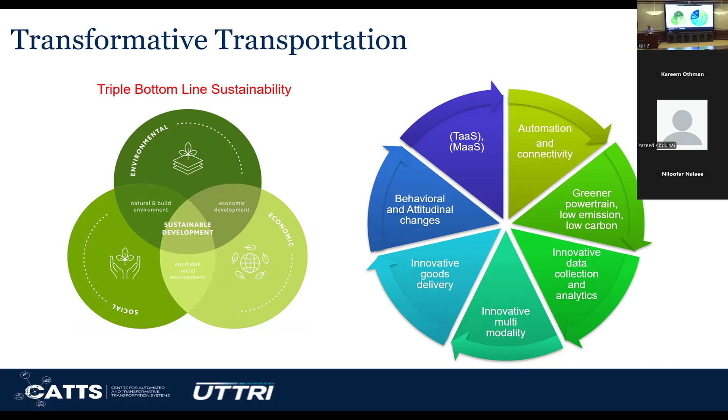Including the emerging mobility as a service and transportation as a service that the entire domain is going towards. And of course, we're guided by the core triple bottom line sustainability principles, including economic sustainability, social sustainability, and environmental sustainability. You can think of the work we do as having three themes.

Theme number one, which was primarily the focus of the first 5 years of CATTS, is quantifying transformation. If we just watch the emergence and proliferation of these technologies, what would happen? There are positive aspects of this and potentially very negative aspects. And then we monitor what happens to our cities in terms of sustainability principles.

Theme number two, what's coming next, is we try to say: okay, if transformation is leading us in certain directions, and if we find those directions are not really desirable, how can we steer it back in a positive direction? So learning from the research before it actually becomes a reality.

Like we all know what happened with the car itself 100 years ago. It showed up, and then all of a sudden suburbs happened, urban sprawl happened, and massive congestion happened. So can we think ahead of the curve this time?

So CATTS 1 has finished, and you will see examples of the research that has been done today. And CATTS Next, the next 5 years, we are trying to move closer to field deployment. If you're familiar with technology readiness levels, we think we're done with the basic research, and we want to drill down, getting closer to technology readiness level 9, field operation testing and field deployment, as you will see in a second, and potentially using the campus around us as a living lab or test bed.

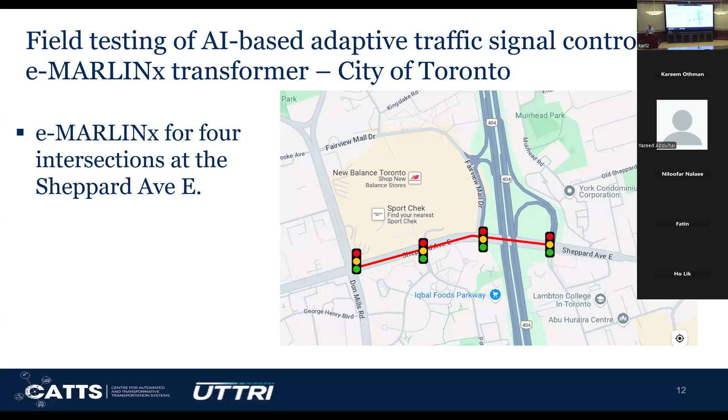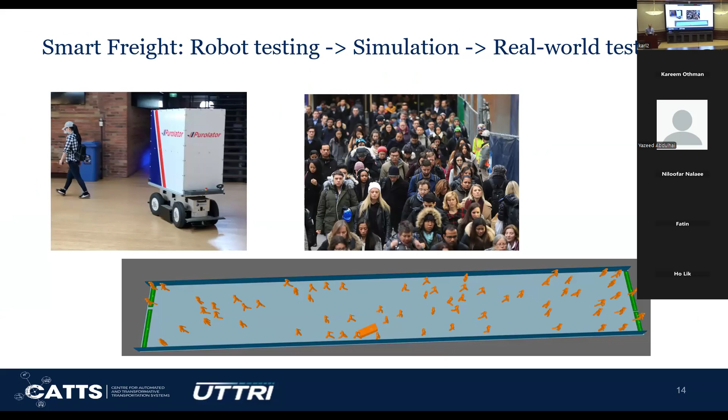And most recently, we've been fortunate to work with the City of Toronto to deploy this system, currently under construction, on Sheppard between Don Mills and the 404. We're hoping to evaluate in Q1 of next year. In terms of automated vehicle delivery, Matt Roorda does research on the Follow Me robot, how it interacts with people and pedestrians, both in simulations and hopefully in real life as well.

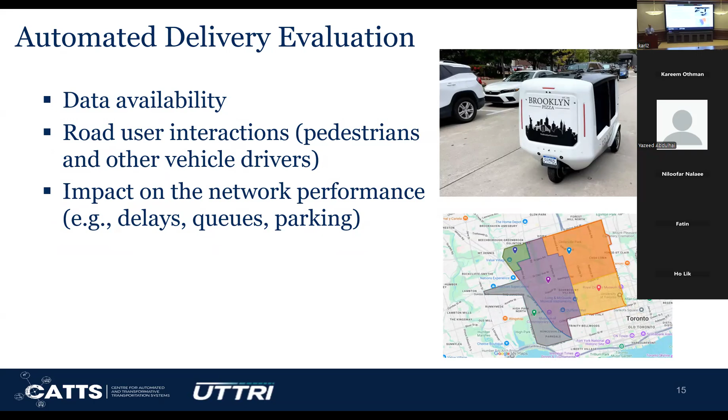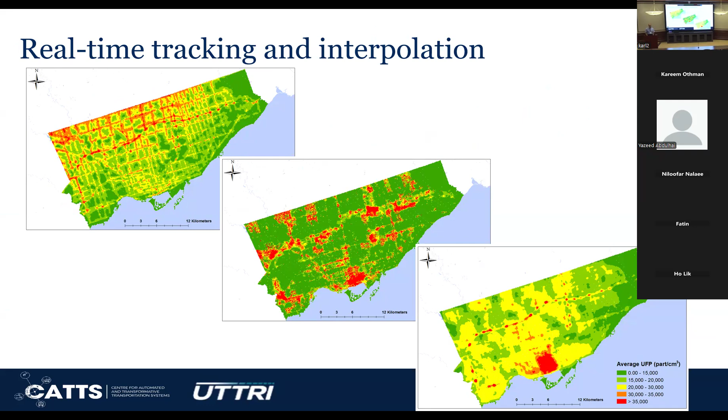Now, there are real life deployments that we can learn from, analyze how they interacted with their environment and impacted city streets. In terms of climate positive, this is Marianne Hatzopoulou's field. She models emissions out of vehicles and how they are concentrated, for instance, in certain areas and around certain corridors. Often people who are less financially affluent are getting higher exposure to emissions.

And she has this urban scanner vehicle that can drive around, take videos, and measure emissions in real time. Now she's working on reducing the size of this bulky infrastructure to be deployable on fleets like taxis and Ubers and whatnot, in order to maximize the sensing and the management of environmental impacts of transportation.

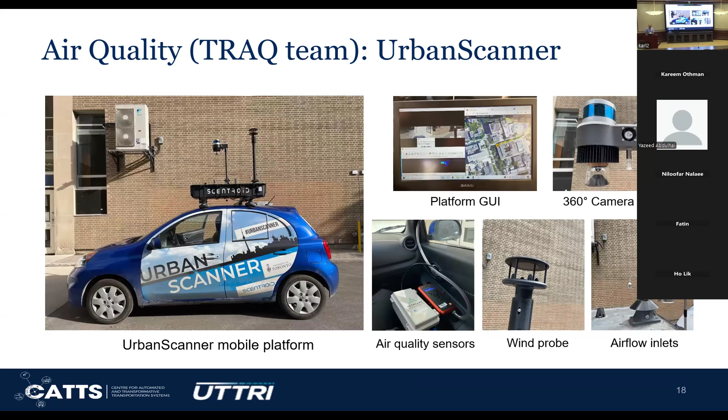In terms of smart transit solutions, for example, dynamic bus lanes and adaptive bus lanes, for instance, interaction between buses as they approach traffic lights, announcing that they are coming, and the traffic light would adapt itself. And then also interact with the bus's back, saying, for instance, if you adjust your speed in a certain way, you will make it to green, you will reduce emissions and reduce battery consumption or fuel consumption, and so on.

And then finally, mobility tools in terms of travel behavior. With all these technologies popping up, who wants to buy them? And how would people adjust their travel behavior in response to the availability of such tools? For instance, if you have an automated vehicle on your driveway, this vehicle can do multiple trips in a day, so it can generate more demand. Or you might not own one at all, because you can call one with your smartphone that would come and pick you up, whether it's a private sector company or whatnot. So we need to understand how people would receive the technologies, interact with them, and change their behavior.

So all these verticals will be addressed more deeply in the next 5 years. Cutting across as a horizontal, there are two research horizontals. One of them is digital twinning, because everything requires modeling, but not just modeling in the sense of a simulation model—digital twinning implies that you have a model driven by real data flows, coming up with decision-making and pushing the decision-making back into the field. So how do we do this for adaptive control, for transit systems, and so on? And AI, of course, everything nowadays is AI, and you'll see many examples today of that.

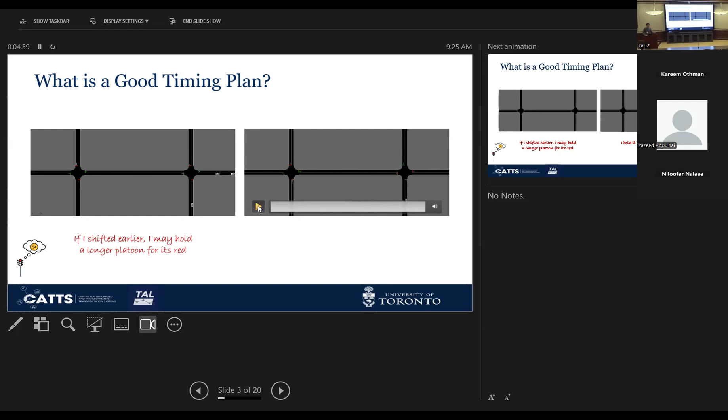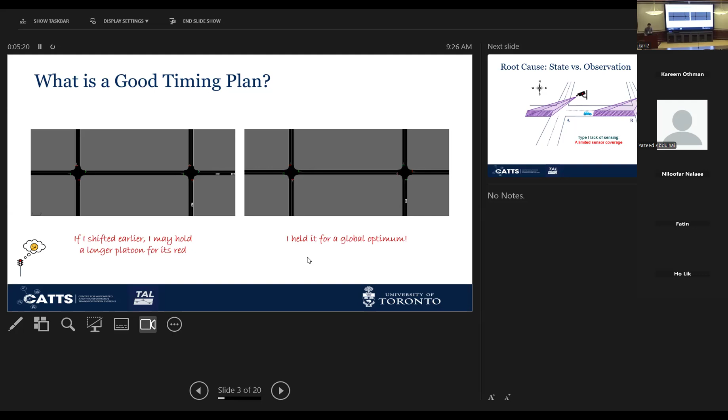From a system optimal perspective, what's most ideal would be to just hold the northbound vehicle for 2-3 seconds and rather let the eastbound platoon go through. That's a better global optimum. But usually speaking, if you're just doing a naive adaptive signal control, your agent can't do the right-hand side strategy as you'd expect. So where's the gap?

There's a gap between what's happening in the field and what you read from your sensors. We call this a gap between the state and the observation. First, you have cameras, loop detectors, maybe LiDAR or radar mounted on poles around the intersection, but they always have a detection range limit. You can put high cost to cover the entire street, but then information sharing, how to address that information, is another issue. So there's a gap in the detection range.

And even if the vehicle is inside the detection range, you have another type of lack of sensing - only a snapshot can be captured by any type of sensor. For loop detectors, you just know there is or isn't a vehicle. For radars, similarly. For cameras, if you have a good enough camera, you know the position, and you can infer the speed and acceleration rate with your algorithms.

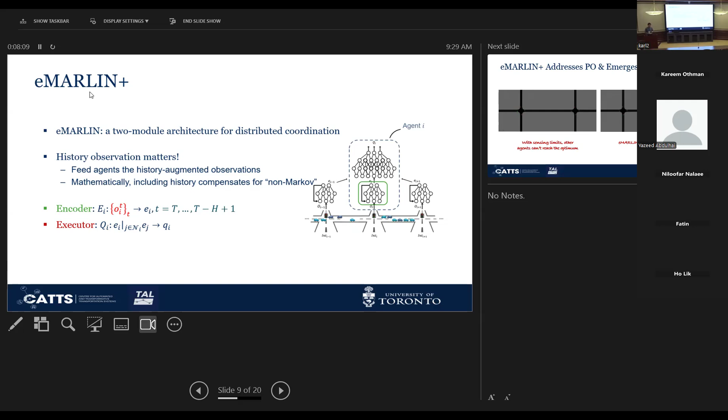So in the very beginning example I showed, if there's really a single vehicle coming, eMarlin Plus can actually let it go through. And even in this more slightly complicated kind of green wave emerging example, or coordination example, eMarlin Plus can also find the global optimum by purely learning from experience.

So with that being said, there's a gap being addressed between the theory and the application research. There's another gap between the application research and the application. And that's why we collaborate closely with the City of Toronto to deploy these 4 intersections with our improved system, which we call eMarlin-X, to the field.

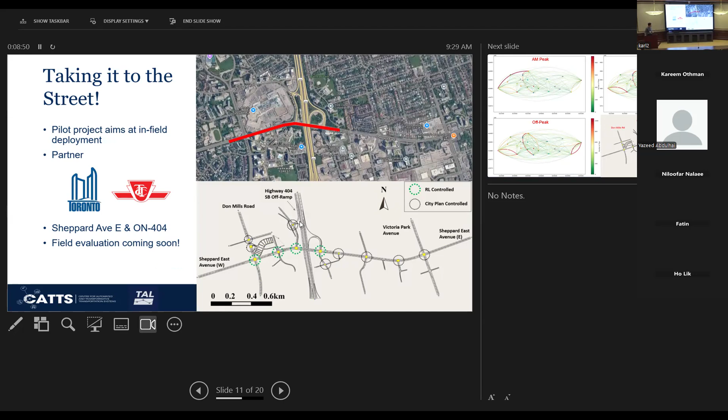So what I was showing is that, okay, in the synthetic network, there are 2 intersections, a few vehicles. We can move those few vehicles pretty fluently. That's still pretty simple, right? The real world is much more complex than what we designed in a synthetic scenario. And this is the traffic demand spatial and temporal distribution around the Sheppard and Highway 404 corridor area. And we see it's clear that it's very unevenly distributed, either in the space or in the time.

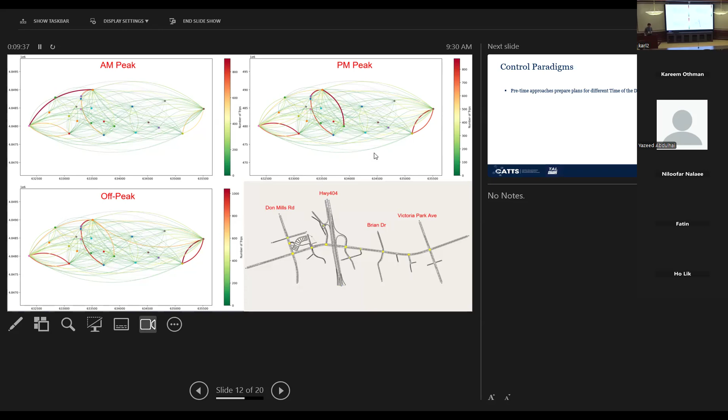And if we go to the traditional control systems, what is the control paradigm? We can pre-calibrate different timing plans according to the time of the day, right? And we give it a different name. We call it specialist. So for eMarlin Plus or eMarlin-X, we can also train different agents corresponding to different times of the day to reflect the traffic pattern, not exactly in real time, but still corresponding to different periods. So we call that a set of specialist agents. We can have an AM peak agent, a PM peak agent, and a few more.

Is there another way? Imagine that there is a single plan that is conditioned on the traffic condition. So this single policy, or the traffic plan, or the control strategy, depending on how you call it, can actually adapt seamlessly over the entire day, entire week, entire year, right? There's no weekday plan. There's no special event specific plan. We don't yet know if it's possible, but let's just call it a robust agent for now. So this single agent can first read what's on the street, get an idea of what the demand profile looks like, and react to the specific traffic conditions.

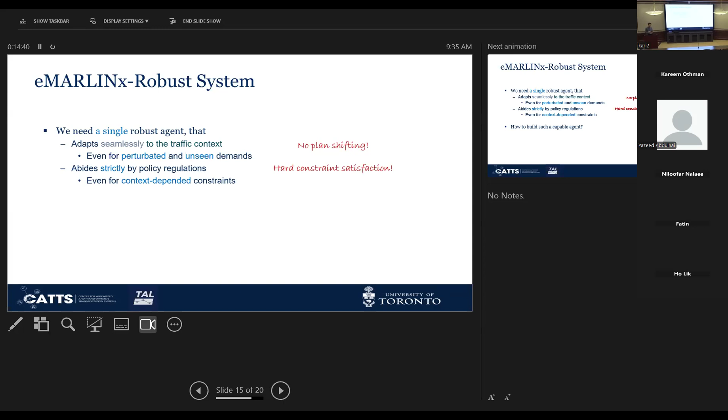And it abides strictly by the policy regulations. It's, again, another kind of minor gap between the lab environment and the real world. You may notice that there's, for example, a leading pedestrian interval spread over the entire Toronto city. That's one of the constraints. You have that constraint, you have less time to manipulate. So that's a really hard challenge for our learning-based system.

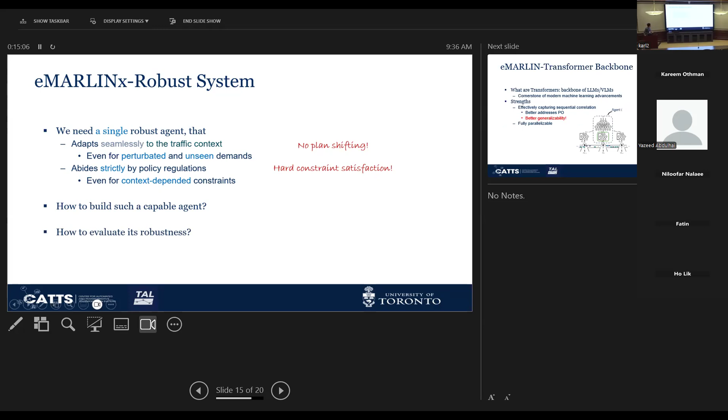And I'll skip this theoretical stuff. Just very high level, our backbone is called eMarlin Transformer, a version of eMarlinX. Transformer is the backbone of modern large models. You're actually using transformers if you're using GPTs. So as a rule of thumb it is very strong. It gives us the capability to address the partial observability as I illustrated in the previous animation. It also gives us better generalizability, better robustness. You can faithfully train the single agent on different scenarios.

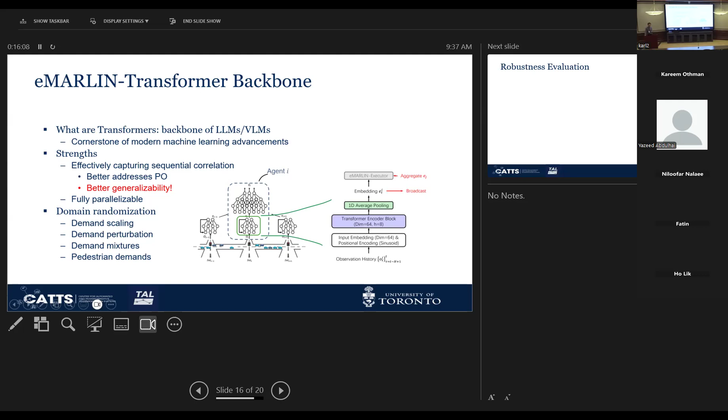And there are a series of tricks. You have a good agent, it can learn many things, but you need to properly train it such that it actually understands what you're expecting, right? So there's another list of tricks we need to perform to push eMarlin towards eMarlinX robust. Training is a little bit hardcore. So what about evaluation? How do we know that our agent is robust enough? We designed a set of scenarios. As you've seen before, we got real-world demand scenarios from three periods of the day. That's the real data we have. But we can always play with those data and get some unseen scenarios for the agent, right?

So the first test is just on these three base demands. But you can scale it, you can do a linear combination, you can activate different pedestrian arrival patterns, basically meaning if the pedestrian pushes the button, the minimum green time for the specific phase gets longer, so your agent gets less time to play with. That makes the scenario harder. You can also do perturbation to the demands. You can also combine some tricks in the previous tests to derive the following tests. All these tests cover a pretty wide range of interpolation or even extrapolation. For example, if you scale a peak demand even higher, the agent has never seen it before, right?

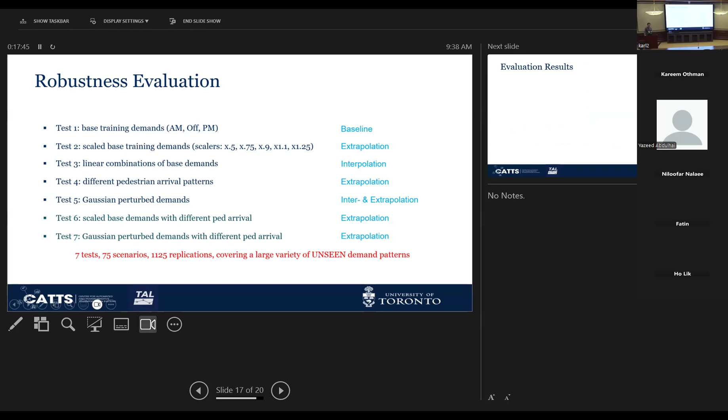Oh, and by the way, the baseline is still TransSuite, and it's a TOD-based plan. So we calculate the distance from a specific scenario to one of the three TOD demands, and we ultimately assign the closest plan to the specific scenario, and that's how we evaluate the baseline. So overall, we're providing real-time, seamless adaptation and coordination with this eMarlinX system.

And facing the field, the eMarlin Transformer Robust Agent can save about 20 to 30% of the delay over this semi-actuated TransSuite system. And moreover, it's a robust agent that performs well against any variations. And that's why it is ideal for deployment.

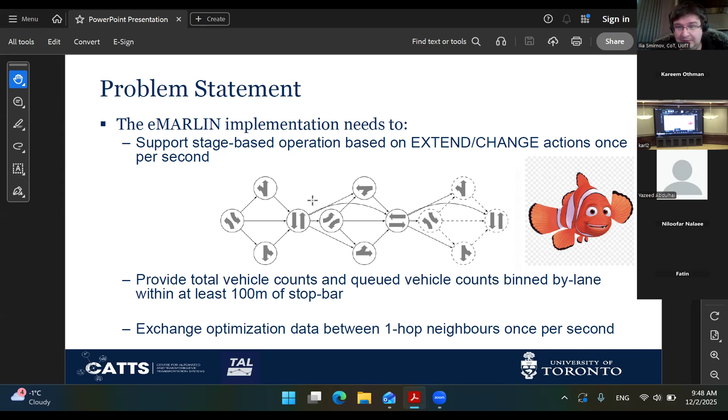And so we need to interface with existing infrastructure, and that requires having a working knowledge of several component systems. And that's, I think, the difficult part here: even though you're not inventing something new, you need to have a good knowledge in order to be able to troubleshoot and have confidence that your implementation will do what you expect. And because different systems accumulate, it can get a little bit heavy. So this is, I think, a more general pattern of bringing research technologies into the field and interfacing with existing infrastructure.

So another theme is that following established standards, like several I'll mention, makes the solution transferable to other systems that follow standards. This is very useful in order to have a system that doesn't only work on the particular set of hardware you have, but might generalize to other similar hardware. And some creativity may be required to get around additional constraints imposed by the existing infrastructure, or if you can't do it, then you need to integrate those constraints into your problem and work with them in order to have a good representation of what you'll see in the field.

These are kind of general themes for the talk, and the remainder will be quite specific to the traffic lights, but maybe if I give a specific kind of map for what the traffic light case is, you can see how some of these things might generalize to your particular problem.

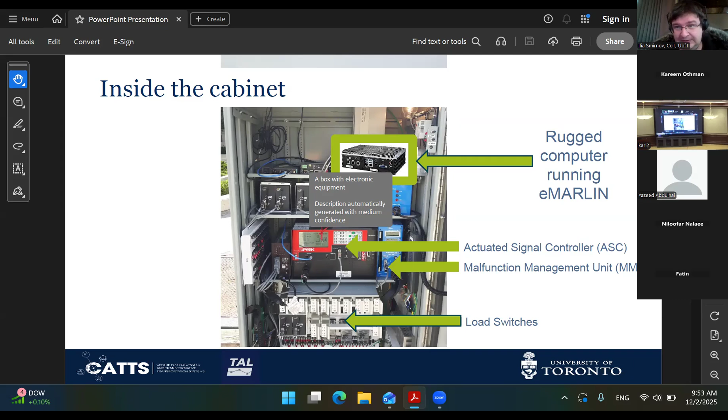And the ASC is the actuated signal controller box that was mentioned before, the red box. And so it places a frame through this SDLC bus to the bus interface unit. It's called Terminal Facilities Bus Interface Unit to actually light up the traffic light. And it also, through the same communication channel as the SDLC bus, gets calls from the detectors. And MMU is also connected through the bus, so it can monitor the communication going on between the different components.

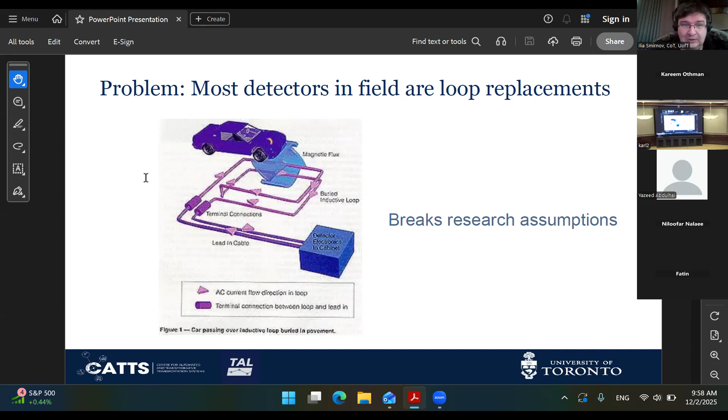And this breaks some of our research assumptions we made when we were doing the research, where we had a more detailed representation of the neighborhood of the intersection in terms of seeing queue counts and vehicle counts over longer distance in the vicinity of the intersection. So what we ended up deciding is, instead of buying detectors that are built specifically for SDLC, to go a little bit outside of the field and get edge IP cameras that do AI on-device analytics, image segmentation, and classification.

These cameras are looking to get into the traffic domain, at least the traffic monitoring. So they're trained specifically to classify traffic objects into classes like buses, vehicles, motorcycles, and so on. And what these cameras do, they do computations on device, and they emit the estimated locations and speeds of each object that they detect, as well as the class, as a separate stream of text.

And so this is much more detailed information than just presence within a certain detection zone. And now you can implement counts from this data. It's actually more detailed data than human counts. But these cameras don't have SDLC support, as I was mentioning before. So if you want to integrate them into this infrastructure in the cabinet, you go through the eMARLIN computer.

So that's a relatively heavy integration problem, where now you need to learn how to stream from these cameras and get the data, parse the data, process the data, and so on. So our project, the eMARLIN project, is not using a lot of the infrastructure that exists in the cabinet, in terms of detectors, bus interface units, and detector cards. All of that is removed and replaced by information coming from the edge cameras to the eMARLIN computer. So it's not using SDLC anymore.

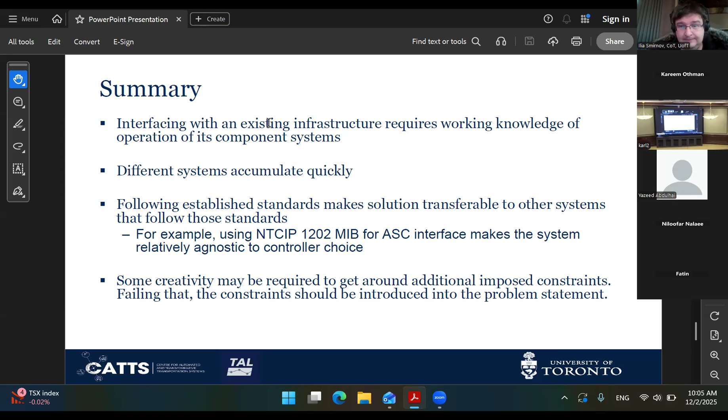Thank you, Ilya. Any questions for Ilya? I'm wondering if you have a sample video from our cameras in the field that you can share. Is it handy? No, it's not handy, I don't have it right away. Well, hold on, maybe give me a minute.

So the status of the deployment at the moment is that the cameras are installed and we're getting the video streams and testing the detections. We've done the so-called hardware-in-the-loop testing, where you make sure the computer is talking to the controller and all the other components, testing in a simulation environment where the simulator acts like the real world. So we made sure all the components are working together.

Currently, once the computer is ready, which is what Ilya is working on, we can turn on the system and start evaluating. Evaluating means you have the video streams coming in, you can calculate the delays, for example how many vehicles are queued, what the average speed is, and so on. Then you can compare whatever you want.

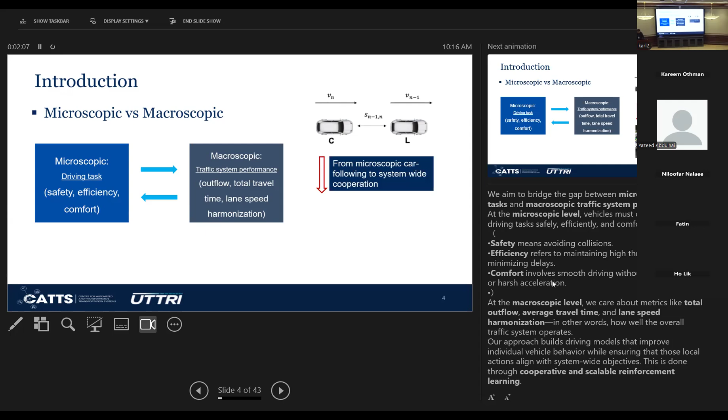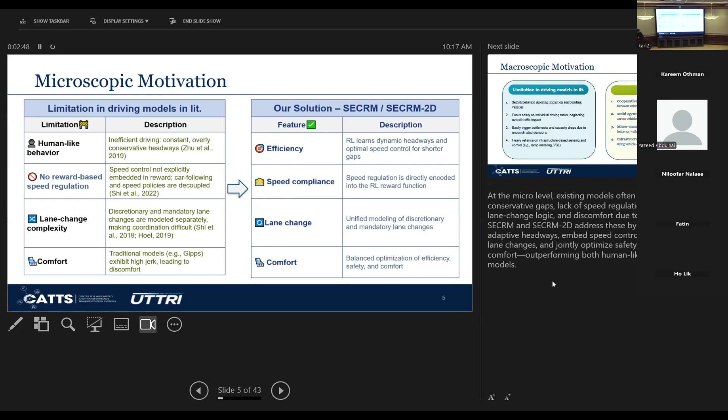At the micro level, existing models often suffer from conservative gaps, lack of speed regulation, fragmented lane change logic, and discomfort due to high jerk. We propose the SECRM model and SECRM-2D models to address these, using reinforcement learning to learn adaptive headways, embedding speed control in rewards, unifying lane changes, and jointly optimizing safety, efficiency, and comfort, outperforming both human-like and rule-based models.

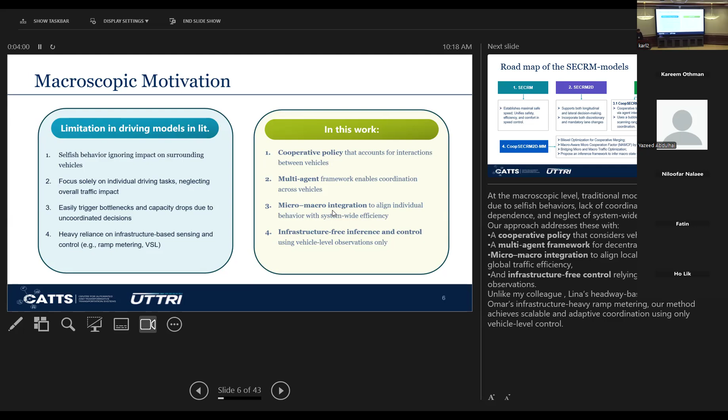This roadmap summarizes the whole evolution of the SECRM model family. We begin with SECRM, which focuses on longitudinal control, unifying safety, efficiency, and comfort through safe speed regulation. Then we propose the SECRM-2D model, which extends the agent to include lane changing decisions, supporting both discretionary and mandatory lane changes.

Next, we propose the cooperative SECRM-2D model, which introduces cooperative behavior between agents with two key variants. One assumes a fixed cooperation factor across all agents and uses a local bubble-level scanning mechanism for coordination. The other introduces dynamic cooperation, allowing agents to adjust cooperation factors based on the speed gap between fast and slow lanes, promoting adaptive interactions. Finally, we propose the CoopSECRM2D-MM. This model builds on this by connecting micro-level agent behavior with macro-level traffic efficiency through bi-level optimization and a macro-aware micro cooperation factor, enabling the system to infer and respond to overall traffic conditions.

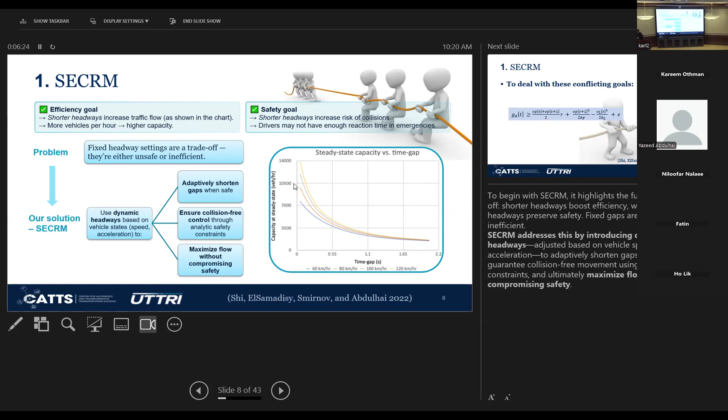So to deal with the safe and efficient conflict, we propose this equation to ensure the follower can stop safely if the leader brakes, considering speeds, braking capacity, and reaction time. And to maximize the flow, the model keeps the gap as short as safely possible, resulting in a speed-dependent adaptive headway. This leads to a variable target gap based on maximum safe speed.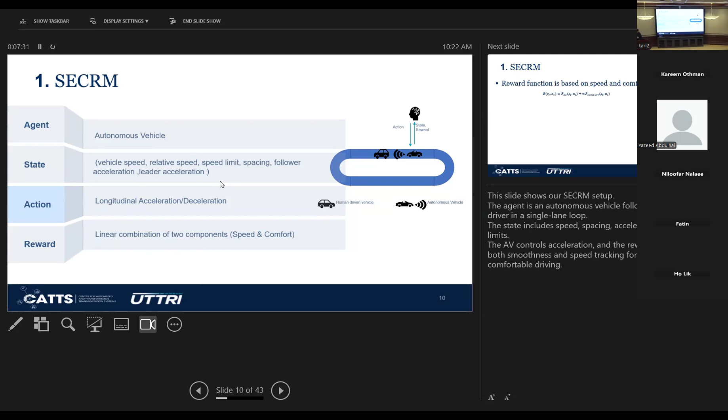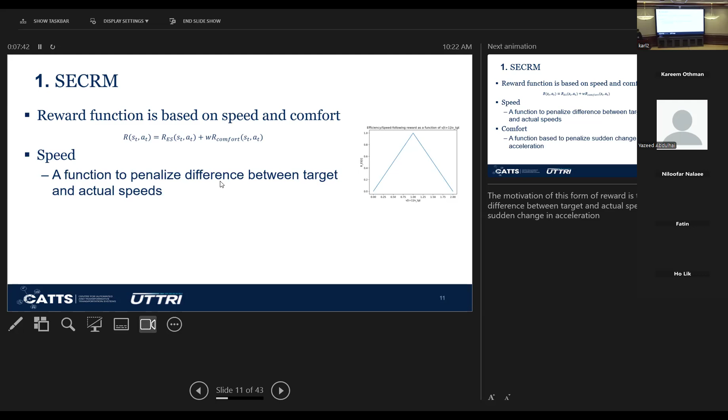This slide shows our SECRM model setup. The agent is an autonomous vehicle following a human driver in a single lane loop, and the state includes speed, spacing, acceleration, and speed limits. The AV controls acceleration, and the reward encourages both smoothness and speed tracking for efficient, comfortable driving. The motivation of this reward form is to penalize the difference between target and actual speed, and penalize sudden changes in acceleration.

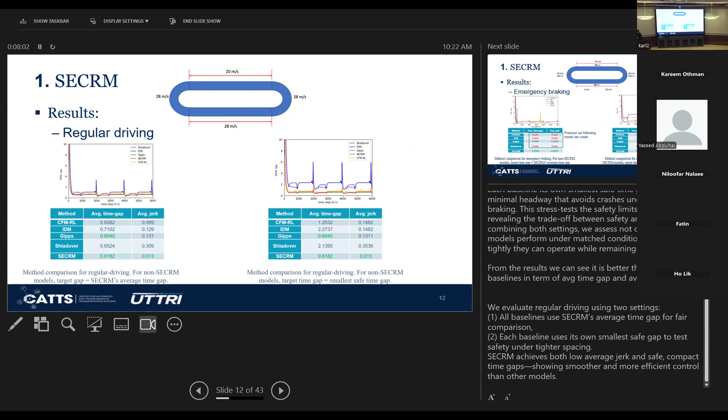Next, this is the result. We can see that it's better than other baselines in terms of average time gap and average jerk. Also, we evaluate the model in an emergency braking scenario. SECRM also outperforms prior car-following models by avoiding collisions and minimizing jerk, achieving both safety and smoothness.

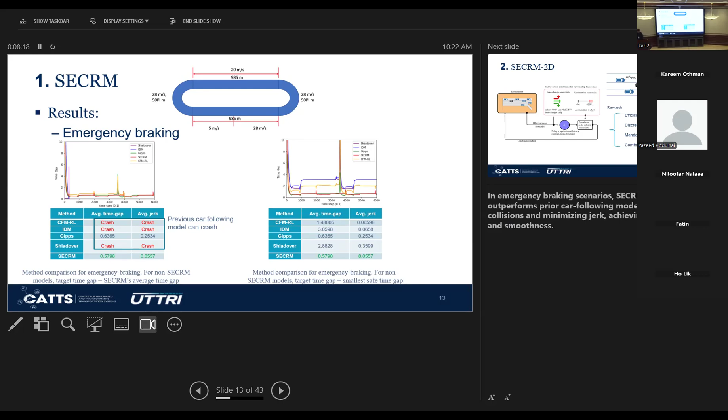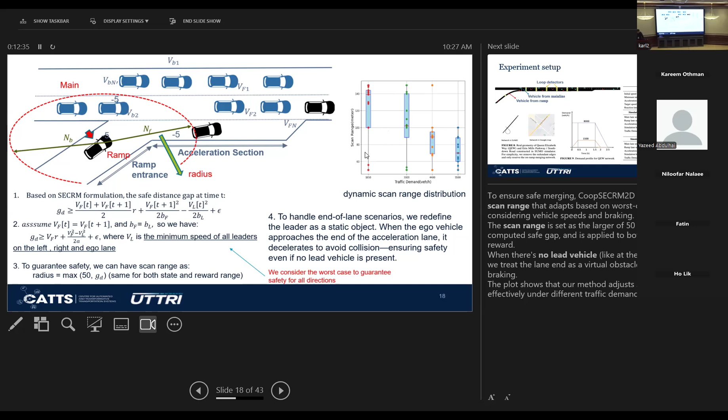This plot also shows that our method adjusts scan range effectively under different traffic demands. We then set the traffic demand profile near SECRM's theoretical capacity, to test how the models can perform under saturated conditions and safe car-following limits.

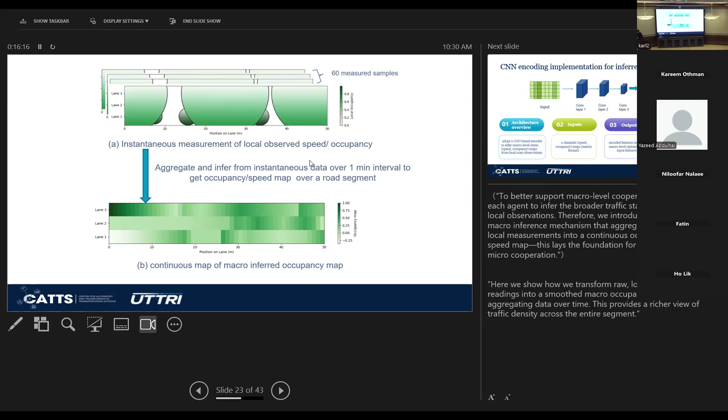So here we also show that we could transform the local raw occupancy reading into a smooth macro occupancy map by aggregating data over time. This provides a richer view of traffic density across the entire segment. And we further show a CNN-based encoding pipeline to infer the macro level traffic states from local scan data.

And I remember I emphasized in the beginning, this is a vehicle level control framework and it's infrastructure free. So we can utilize the measured sensor data to infer global compact macro features for downstream optimization.

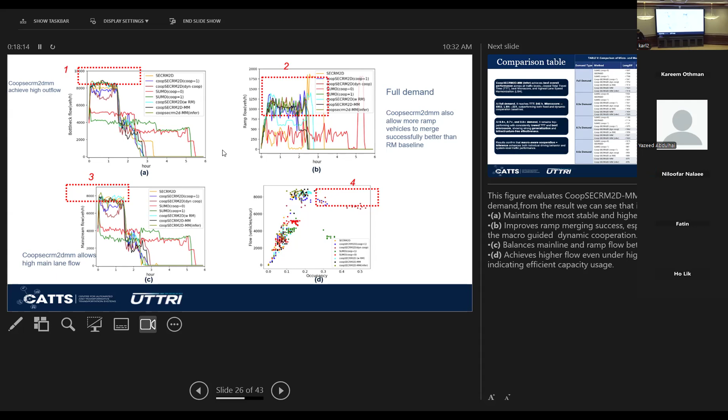So this figure evaluates cooperative SECRM-2D-MM under full demand. From the results, we can see that it maintains the most stable and highest outflow, and it improves ramp merging success rate, especially thanks to the macro-guided dynamic cooperation, and it balances mainline and ramp flow better than baselines. Lastly, it achieves higher flow even under high occupancy, indicating efficient capacity usage.

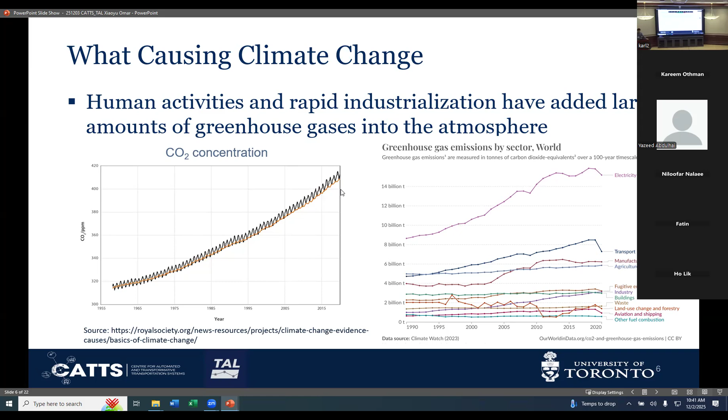So most people might be aware of this right-hand side chart. It says within either the world or Canada, the second largest sector contributing to greenhouse emissions is transportation. Right here, it dips down because in 2020 there was a pandemic around the world, and if we go back half a century and track the history of CO2 emissions and the concentration rate, it keeps increasing very steeply. And governments around the world, including Canada, have paid a lot of attention to this phenomenon.

And there are some efforts from different perspectives. So for example, in this study, VKT is the vehicle kilometers traveled. Across the time period from 2004 to 2016, we see that there's no significant drop in vehicle kilometers traveled. But if you go to emissions, the toxic emissions or the PM2.5 emissions, they actually all go down. It means the regulations on maybe the fuel standards and the vehicle manufacturing standards are altogether contributing to this reduction in the emissions and the concentration, either greenhouse gas or pollutants.

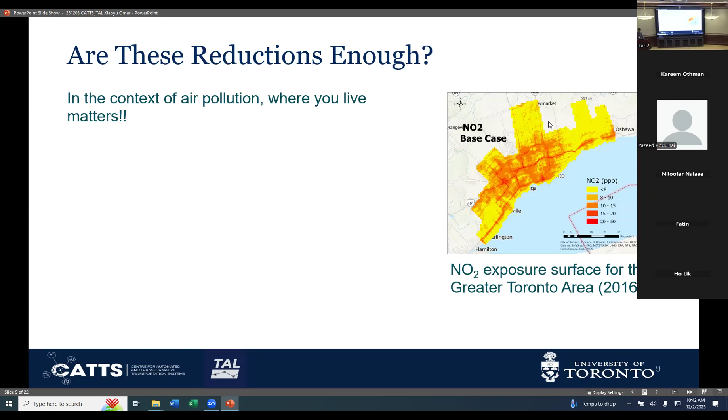Yes. So is that enough? Although it has been decreasing, if we look at NO2, this toxic emission, its concentration across the Greater Toronto Area, we can see that what WHO suggests is a standard of 5 ppb, and across the Greater Toronto Area it is far beyond 5. Most of the Greater Toronto Area is above this WHO suggested standard. And what are the potential directions for further decreasing these emissions?

Policymakers are certainly paying attention to different fields, but as transportation researchers, think about what is the most severe scenario when the vehicles will produce emissions. Idling, congestion, right? When vehicles are congested in a platoon, either on the freeway or in front of an intersection, it generates more emission.

Also, if the vehicle is in a stop and go behavior, it accelerates and decelerates. That's something more than greenhouse gas emissions, because brake and tire wear in stop and go behavior will generate more, for example, nitrogen dioxide or PM 2.5. So let's see, if we address the traffic behavior, giving smoother platooning on the surface road or the highway, can we get a better future in terms of environmental impacts?

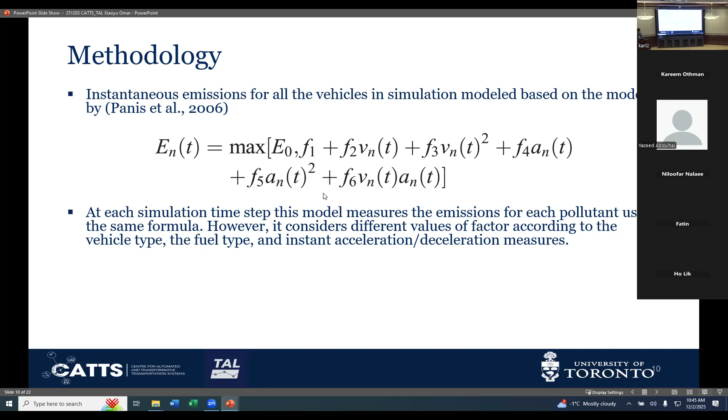So the methodology is that we pick an emission model. There are actually more available, but this could be one of the selected models. And this is the detail of the model. There are different hyperparameters for different types of cars and different pollutant types. So we run the entire simulation with this emission model equipped, either with ramp meter control for highway or signal light control for road networks.

And also in the previous slides, I was showing the emission was decreasing, but there's another detail saying that although private vehicles, small cars, are traveling more kilometers, they're actually contributing much less emissions. So when we're modeling the highway stretch and the surface network, we'll also pay attention to the split between light-duty vehicles and trucks, according to some publicly available data set.

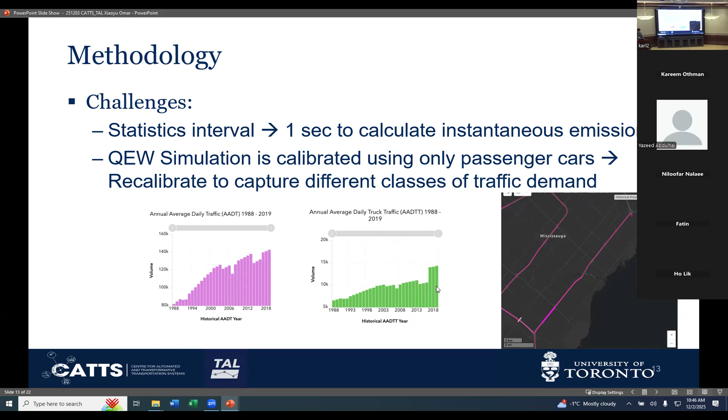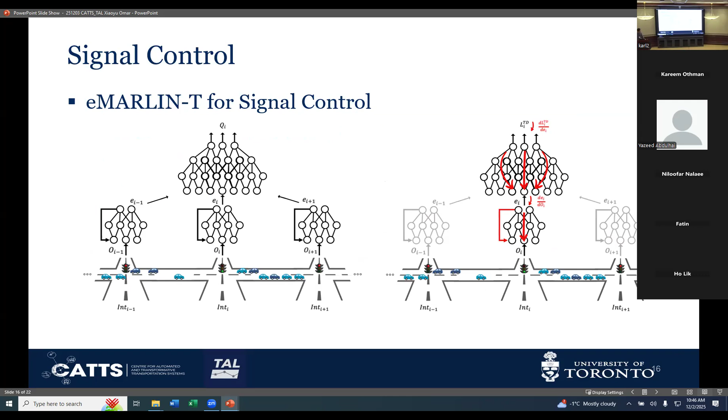And the same network here for surface road, and another simulated network for the QEW to illustrate the impact on highways. So there are 10 controlled on-ramps, either reinforcement learning controlled or classic controllers. And we're using the real demand, but doing this light-duty vehicle and truck split according to this data. And as I mentioned, same backbone method. But this is for signals, this is for ramp metering, because they operate in different dynamics and different control intervals.

So on the highway ramp metering, after recalibration, with the traffic demand with the trucks being considered, we're comparing to the base case, which is without control. Alinea is a very standard ramp metering control algorithm. This is collaborative Alinea and variants of Alinea, and this generalized version of eMarlin generalized towards this ramp metering scenario.

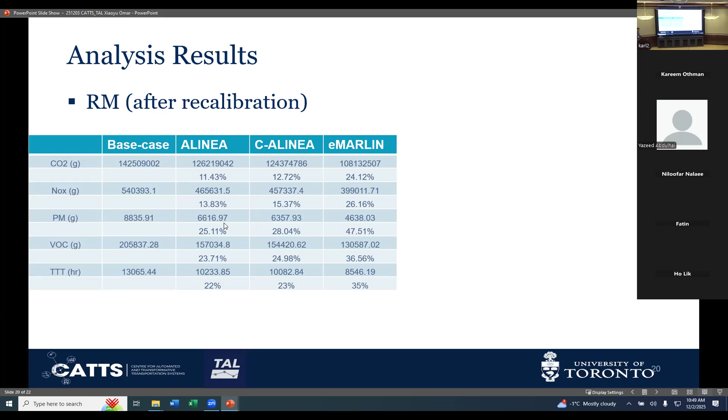And also, if we take a look across the board, total travel time, this collaborative version of Alinea is not dominating the standard Alinea, but our agent, which can reach an even better level of coordination, is doing significant improvement on the total travel time. But also, if you look at the emission profile, it's like getting double the savings in some emission metrics. And this is a bar chart. So considering we don't have much time, this is a better visualization.

And also the previous total travel time we calculated is the overall network travel time. So if you consider that we're pushing the vehicles to the service road north and service road south, the studies suggest that it's saving the total travel time across the highway and the local roads. And similar findings for emissions.

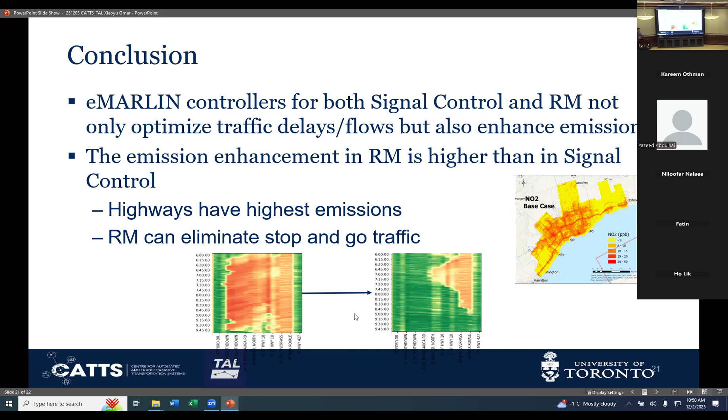Thanks again, Xiaoyu. So the hypothesis here is that if you fix traffic, you also help the environment. We knew that, but we wanted to quantify it. And indeed, we're seeing in the order of 10%, 12% reduction in emissions when you adaptively control traffic, whether it's on surface streets or on freeways. So with that, we reach